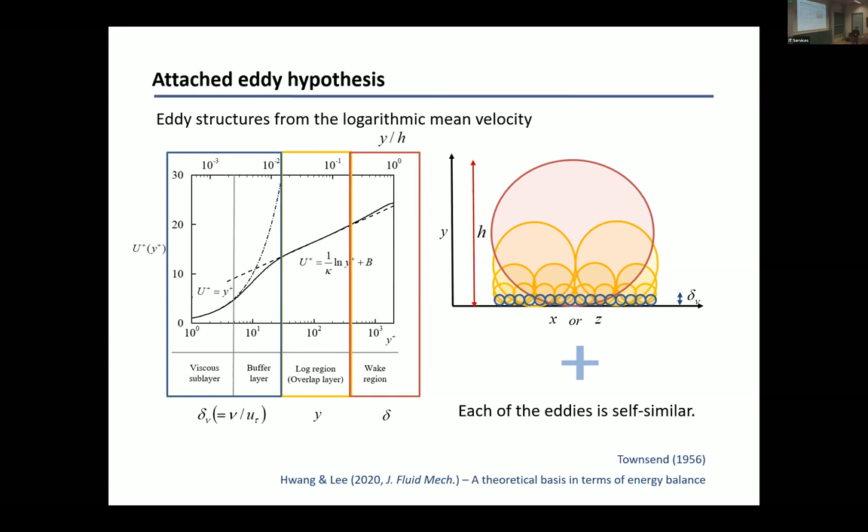So basically, if you have self-similar production, dissipation, transport and integral length scale, your mean velocity profile must be logarithmic. What we have also found is that we managed to find invariant solutions which are self-similar, okay? But these structures do not all exist in the same domain; they are just self-similar. These possibly represent individual ones.

And we are not the only ones who computed this type of solution. Initially, Bruno Eckhardt, before he passed away, computed this sort of thing for Couette flow by continuing EQ7 and EQ8 of John Gibson's solutions. And then Tobias Schneider's PhD student also computed this for the asymptotic suction boundary layer.

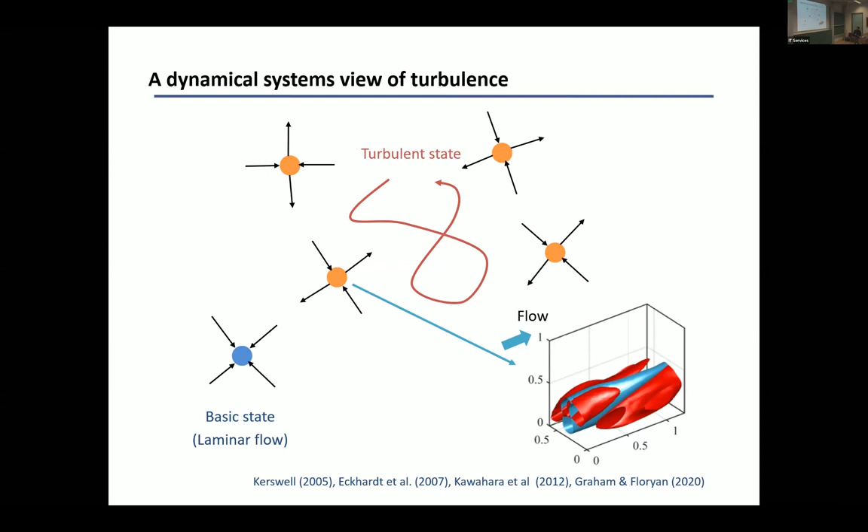So when we found this, in a superficial sense, we can use this picture, okay? Each dot here represents, say, an individual attached eddy, and you assume that turbulence is just bouncing around, like the pinball picture we saw on the first day, and laminar flow here is the stable solution. That's the picture we often use to justify the relevance of this type of solution.

So what we wanted to do is test this step by step. First, we've seen quite a few minimal flow unit talks this morning by Daniel and Sherbin. We consider the same minimal flow unit, but we take a bit more aggressive approach. We wanted to cut out the entire outer part of the wall region and only isolate this guy. We don't want to solve somewhere out there.

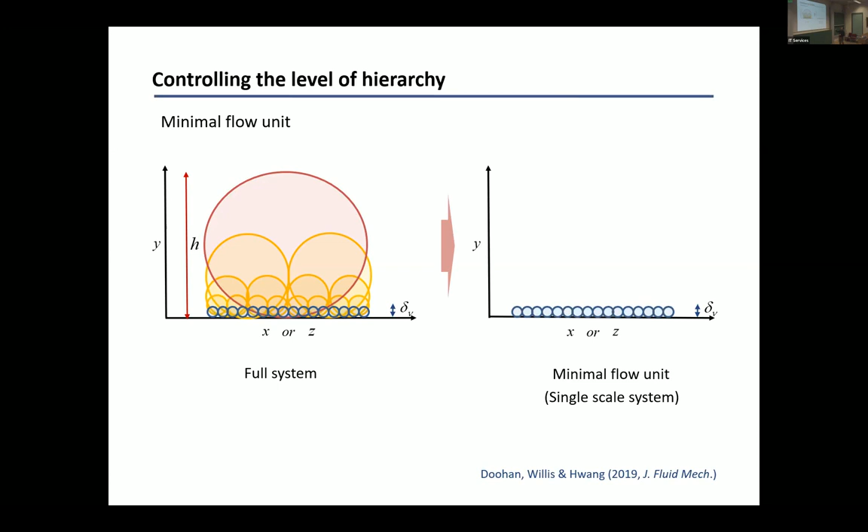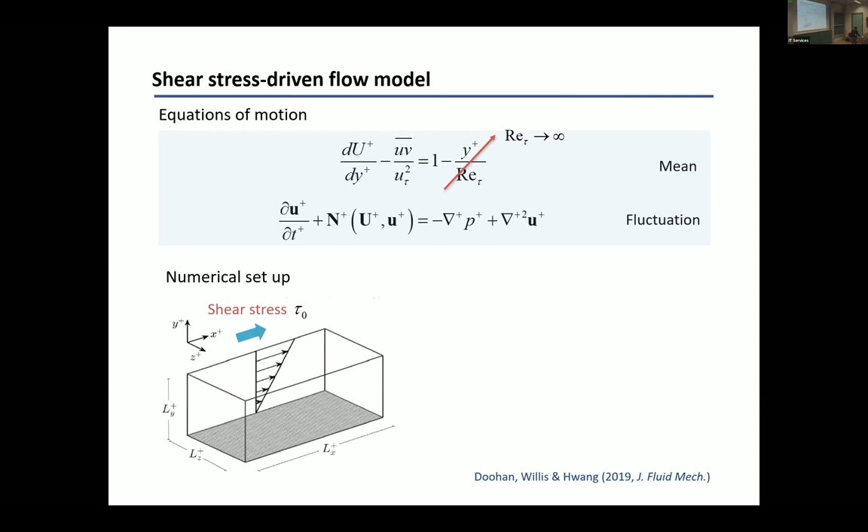So by doing so, we removed this term, and then at the top of the simulation domain, we apply basically a uniform shear stress, and then we removed all the top domain to control the hierarchy in the turbulent flow. So we then consider a typical minimal flow unit box size. So here we have 90. Okay, so we are now really restricting the domain even more in this direction, and we take this minimal flow unit pioneered by Javier.

So we computed quite a lot of solutions, actually 13 solutions here. And then we just visualize the usual observables that we know from the self-sustaining process. So here, these are the streaks. This is basically the box-averaged streamwise velocity. These are the rolls, the energy of the uniform rolls in the streamwise direction, and the rest is the waves capturing the meandering motion of the streaks.

So what you see here is that, consistent with the picture I have shown previously, we have a bunch of upper branch solutions here. One of them is a periodic orbit, the short periodic orbit, and turbulence really seems to be bumping around, but this turbulence is actually a chaotic saddle. So the edge is leaky, as we discussed, and sometimes it dies out. And when it dies out, it's actually bumping around the lower branch solution. Okay, that's what we saw from this simulation. So we are happy so far.

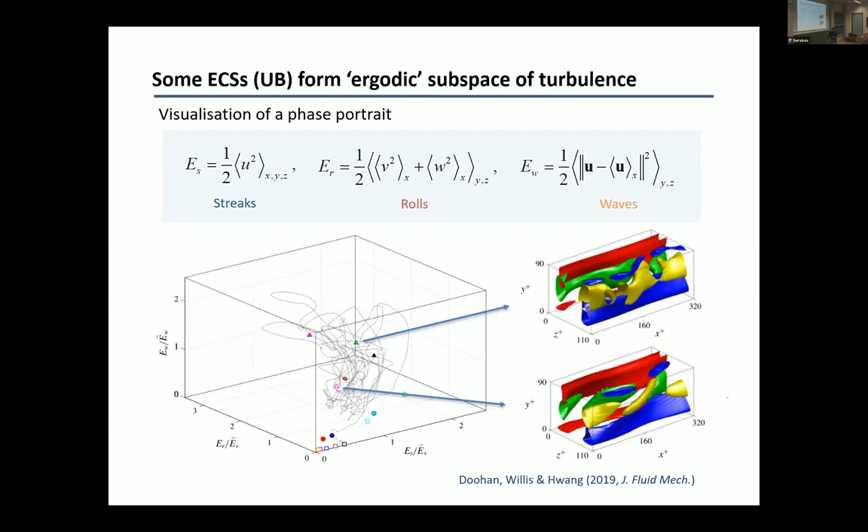And what we know is that those upper branch solutions do actually form a kind of ergodic subspace of the turbulence, which means turbulence really visits these guys to some extent. So these guys may really be used to approximate the turbulence statistics or whatsoever.

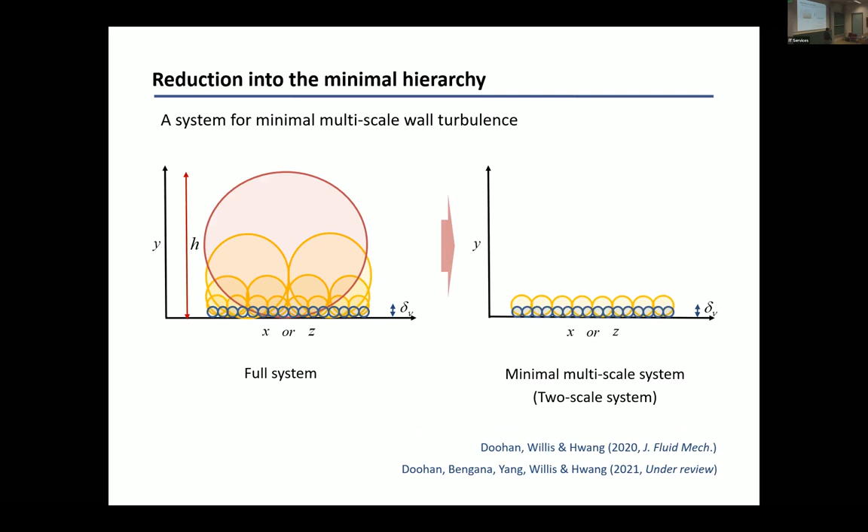So now we consider a slightly more aggressive case. We consider two-scale minimal flow units. So we have one big structure, and then a smaller structure which can live in the near-wall region. Exactly the way we have done it is that we took exactly the same model, but roughly doubled the box size in all directions. So then we have one big structure here, and a typical near-wall structure as the smallest possible structure here.

So here the situation is a bit more complicated because we have multi-scale behavior in the system, so we had to come up with different types of observables. What we do is consider turbulent velocity fluctuations and decompose them into large scale and small scale. The large scale just contains the structures whose spanwise size is the box size in the spanwise direction. Because structures in turbulent flow are typically elongated, this contains all the large-scale streaky structures, etc. So this is a reasonable way to capture the largest scale. And for the small scale, we just use the rest.

Then we wrote down the equation for each scale. Here P is a projection operator to the particular scale. PS is the projection to the small scale, PL is the projection to the large scale. So this is without decomposing the linear term in that way. What we have done is multiply UL here and US here, and then integrate over the computational box. So this equation is a bit complicated. I think it's important for me to go through.

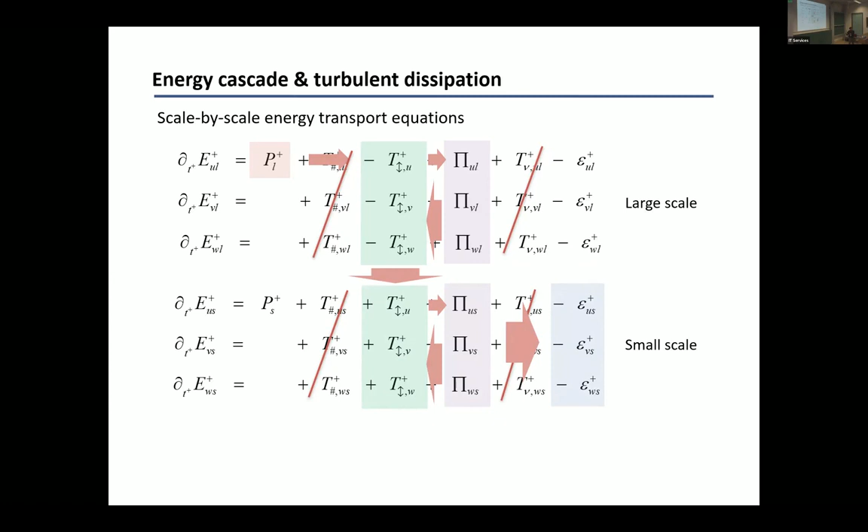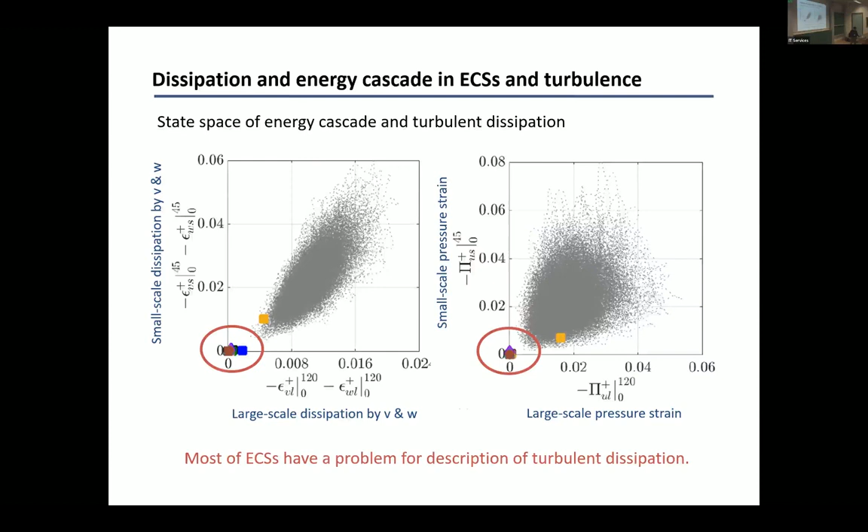If you really plot the dissipation, this is one of the upper branch states that we have, the larger-scale upper branch state, and this is the dissipation contour. This is the larger-scale coherent state. You see that the dissipation is actually quasi-2D, in the sense that these are just elongated, fairly flat, like this. On the other hand, if you look at the dissipation of the turbulence, it's fairly isotropic.

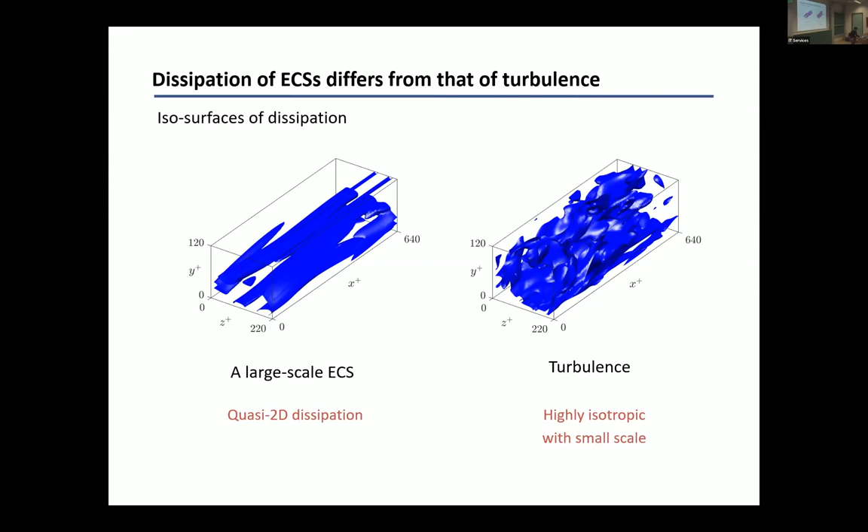So then where does this come from? Let me write down the equation for U. Okay, this is a full velocity fluctuation. So full velocity, and capital U is the mean, and I'm going to decompose the fluctuation into the x-average, streamwise average fluctuation, and the rest. Then I will have this equation for the streamwise-averaged velocity fluctuation here, and this is basically 2D Navier-Stokes.

But this equation is known to be globally stable at all Reynolds numbers. It will never generate a non-trivial solution if you go to high Reynolds number. Therefore, the only possible way to derive some non-trivial solution is through this term. Okay, and also this term contains the production term, but this is the equation for the streamwise average velocity fluctuation. This describes basically the lift-up effect that generates the streaks.

And the rest of the equation is this, okay? And here we have another production term. This is typically known to generate the streak instability, meandering motion of the streaks. Okay, so this is the term that you have. And the exact coherent state means these processes exactly balance each other. So this equation leads to the non-trivial velocity fluctuation here, but once U zero is large, this can create the instability. So therefore, this is a two-way interaction. You can find some steady solution which exactly satisfies this balance.

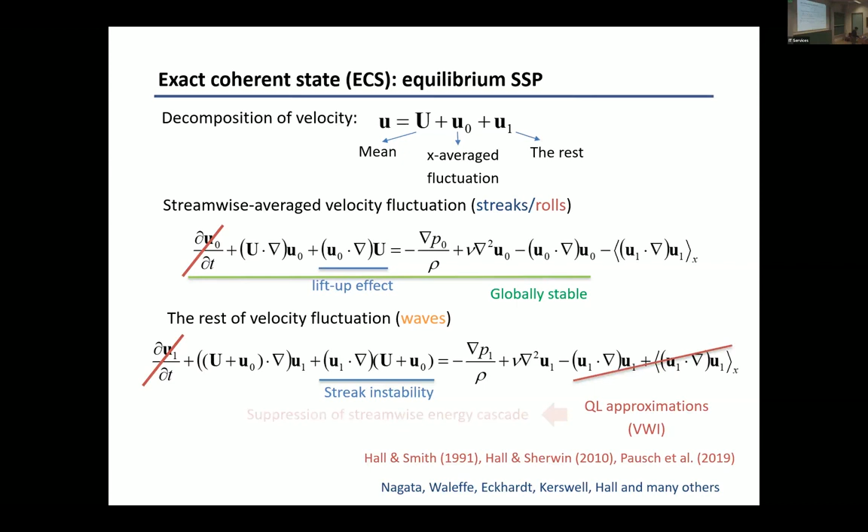And the other thing I'd like to say is that this one is also kind of triggering the energy cascade in the streamwise direction. Therefore, it's acting as a precursor of turbulent dissipation. If the Reynolds number is large enough, this linear part of the equation typically gives you large values around the critical layer of the streaky flow. In the exact states you see here, the blues are dissipation, and they are all around the critical layer. And what is interesting is that you see exactly the same in turbulent flow. Basically, this streak instability process is kicking off turbulent dissipation.

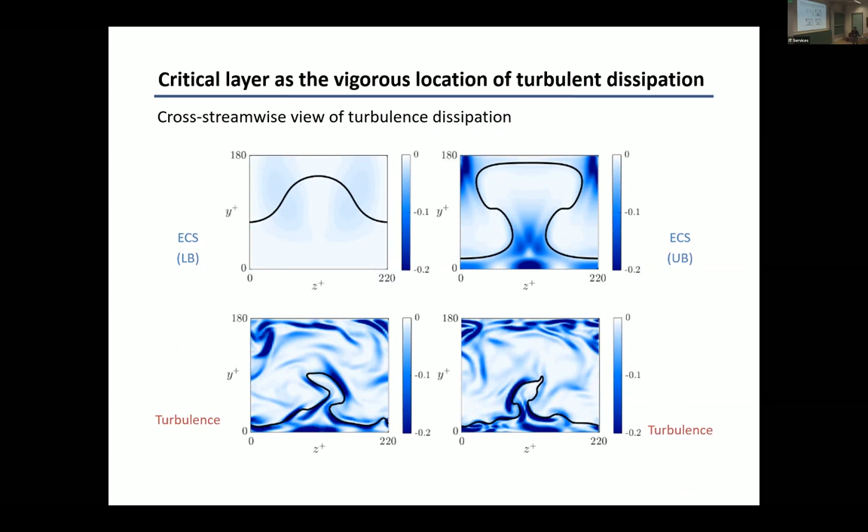Okay, that was the one thing. The second thing is, let me come back to this picture. So we had the energy cascade here. We transport energy from large to small scale, but sometimes the transported fluctuation at small scale excites the production at small scale. But production typically requires the V fluctuation to have a non-zero value. So let me track what is happening here.

What I'm going to do here is compute the correlation between this pressure transport, the nonlinear transport in the Y direction, and the small scale production. If you look at these three time traces of three observables, especially the black one and the production at small scale, you see that they are fairly well correlated. And if you really calculate it, the correlation coefficient is not really small. It's 0.5.

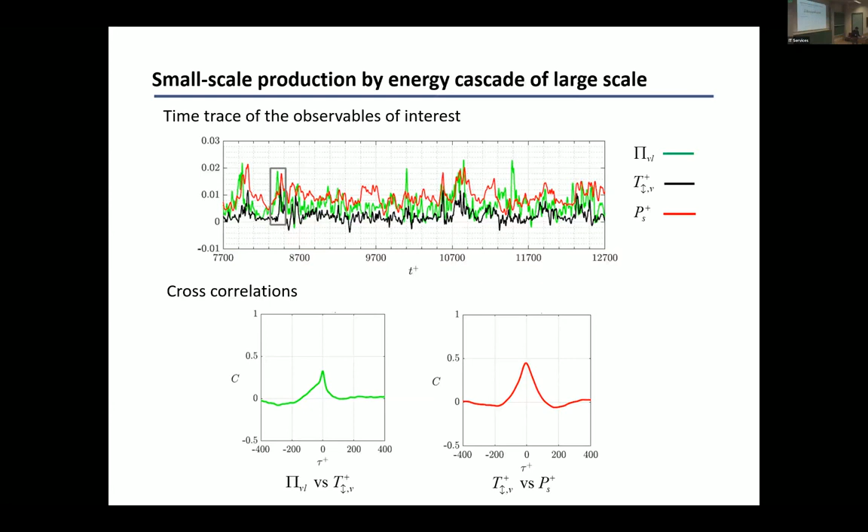So let me see what is happening here. Let me just take one instance here. This is again the time trace. The green one is the pressure strain transport at large scale. The black one is the nonlinear interscale transport. And the red one is production. And this yellow one represents the small scale streaky motion. So let me run a movie.

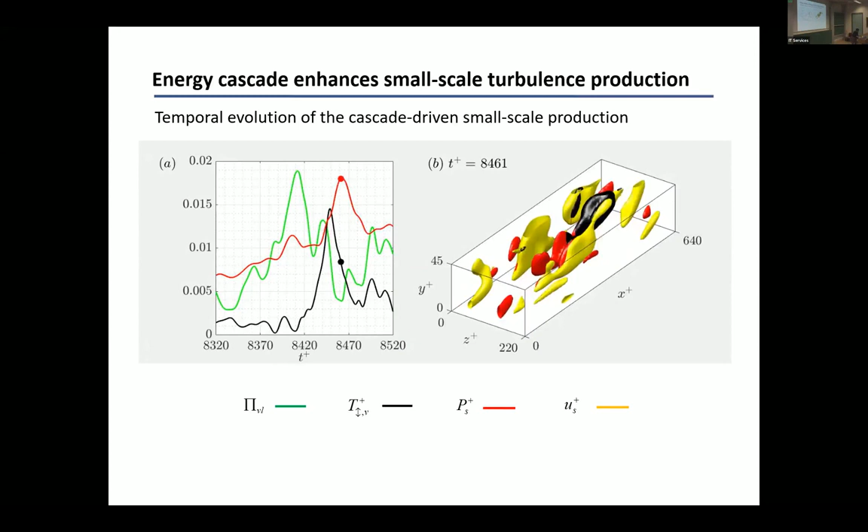You see that when the nonlinear transport becomes large here, production and this nonlinear transport are actually all collocated. So basically this triggered the production like this. If you look at this picture from the side, that's what we see here. I think quite many of you are familiar with this. This is the Orr mechanism. This is not the intrascale process. This is the interscale process, essentially.

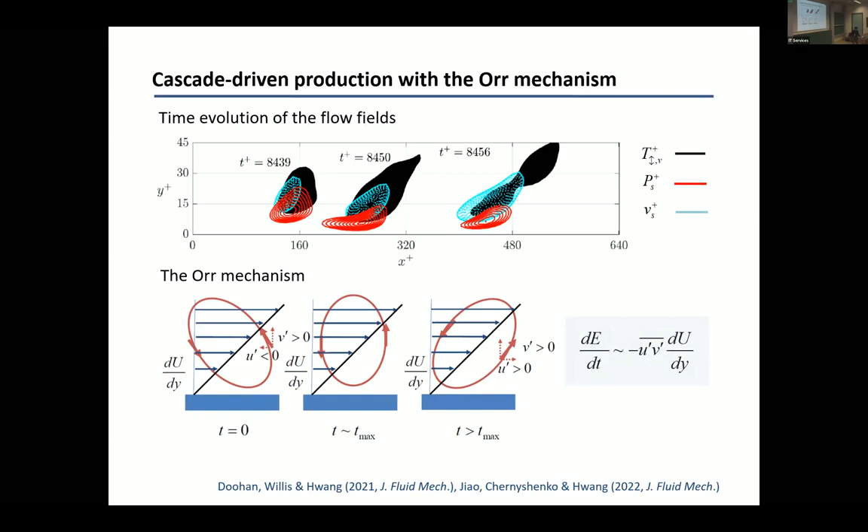So let me conclude. The answer to the original question is probably not. And what exact coherent states really do is depict the partial physical process of multiscale turbulence. So we also learned quite a lot by doing this. We have two: a large-scale self-sustaining process and a small-scale self-sustaining process.

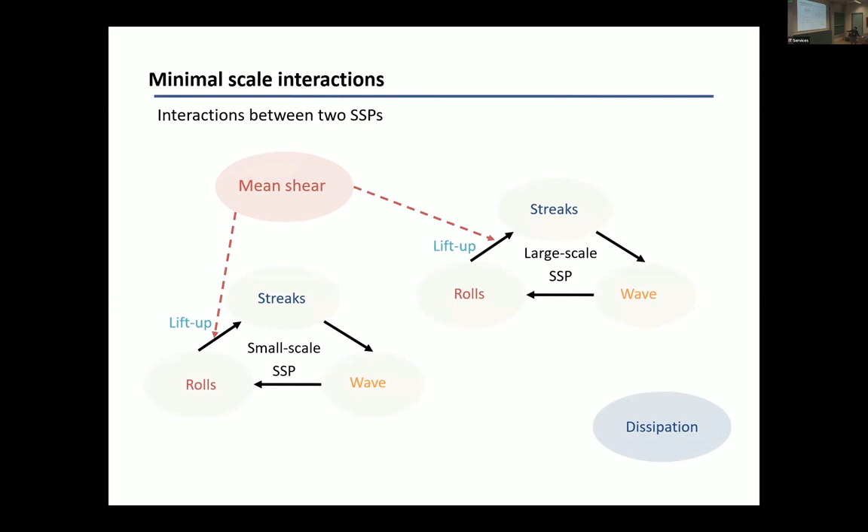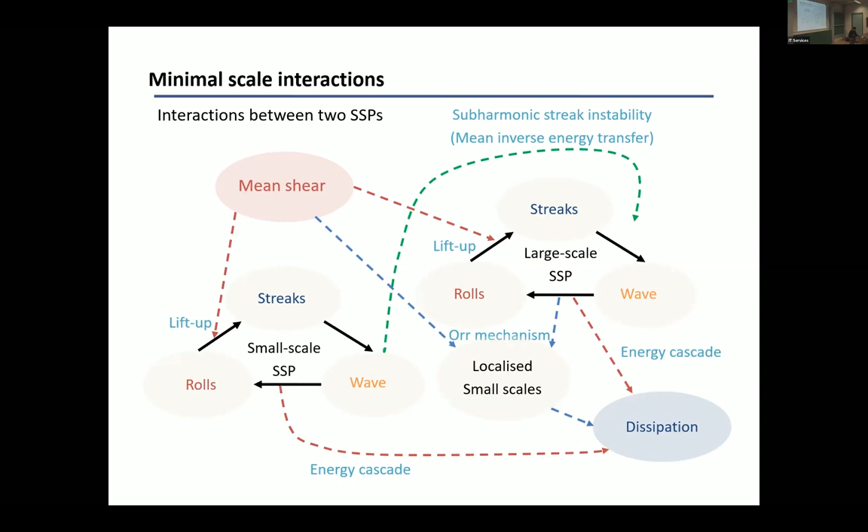And the most fundamental thing in shear turbulence is production and dissipation, with the mean shear pumping the energy for the lift-up effect. And dissipation takes place when the streaks break down. In between, when this breaks down, it can trigger the Orr mechanism, causing another dissipation. The other thing we discovered is that sometimes when waves break down, they can feed energy to the larger scale. And this is related to that particular type of coherent state.

And the last thing I'd like to say is that we may get the criticism that we really didn't compute the right solutions. That's a true criticism we have to take. But let me explain how difficult computing such a solution is. I'm going to consider a two-scale system. In shear flow, they have to have different speeds. Therefore, if you consider two traveling waves propagating with different speeds, then in the moving frame, this solution must be a periodic orbit.

So we tried to find this multiscale periodic orbit by superposing many solutions, but we've never been able to find it. What this picture also says is that if you consider the dynamics of these two structures, it will be a very exotic solution, like quasi-periodic solutions such as tori, etc. So in general, if you consider many scales, they should be quasi-periodic, very chaotic solutions. So that's the general difficulty. And we know that as we increase the Reynolds number, it gets incredibly difficult to calculate this kind of orbit. So let me finish here.

Okay, so. Here we go. Yeah. So thanks a lot.

I just wanted to add to your last point, which is exactly what I wanted to say before. What if we have to look for tori, and then we are lost? So I wouldn't say the dynamical systems picture is wrong in any way, but we don't have the means to find the structures that are relevant.

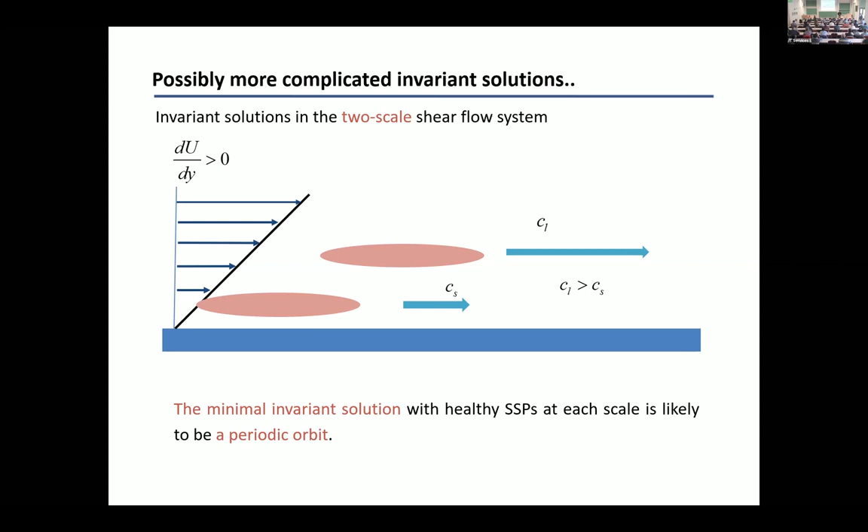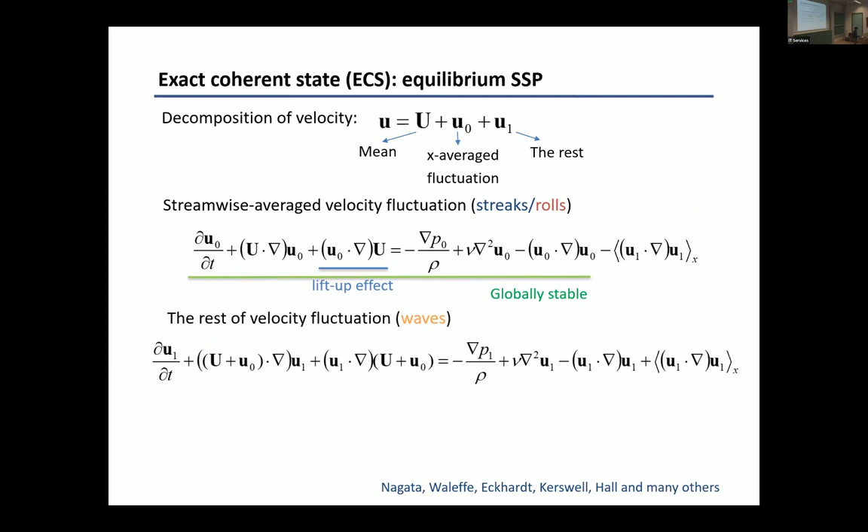Yeah. Just a small comment. I've made this comment before when you gave this talk. I don't see why you have the confidence to call this a multi-scale system. Your large scale is one wave number in the spanwise, the outer scale, and then you're drawing all these conclusions from just that. What's to say you couldn't cut your domain in half in terms of the spanwise wave numbers? And that's what I did. No, but in terms of the wave numbers, not the actual spatial scale. You just have KZ as your outer scale. I'm saying, split the wave numbers in KZ. I don't know how many you've got in your simulation, 30, 60, and the first 15 are your scale, but it's all quite artificial in some sense, right?

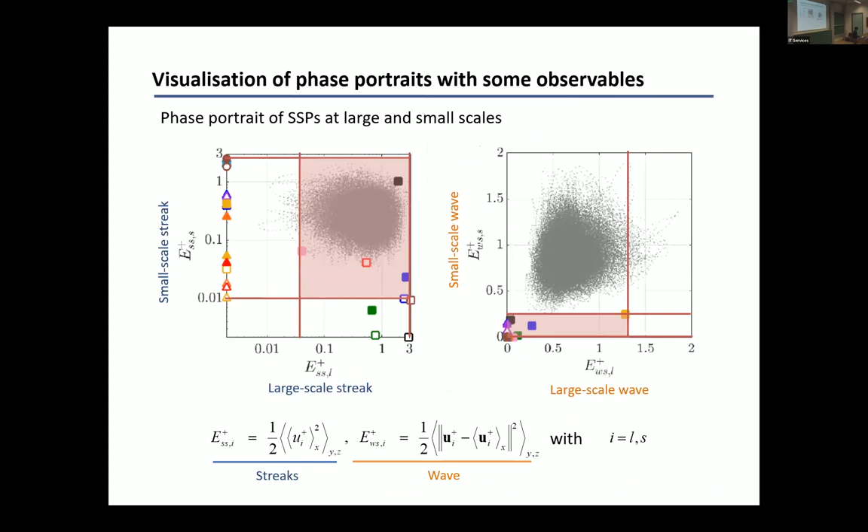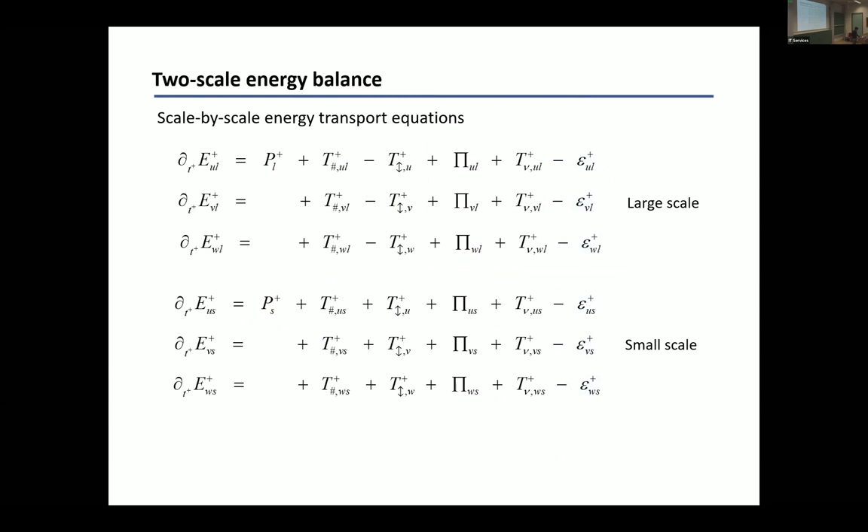Okay, so let me explain that to you. Let's try again. So you see this here. You see that this streak structure is elongated all the way down the domain. So basically, at this scale, the largest energy containing wave number is kz equal plus minus 1, the fundamental harmonic, and kx equal, say, 0, right? In this one, you see the same, kz equal plus minus 2, but it has to contain everything in the x direction because the smallest length scale still extends all the way to the box size. Okay, I'm not claiming that I did a very clean decomposition. Isn't it just arbitrary? Yeah, but my point is that if you do so, then this one captures mostly large scale, that one captures mostly small scale. That's what I'm saying, nothing more than that.

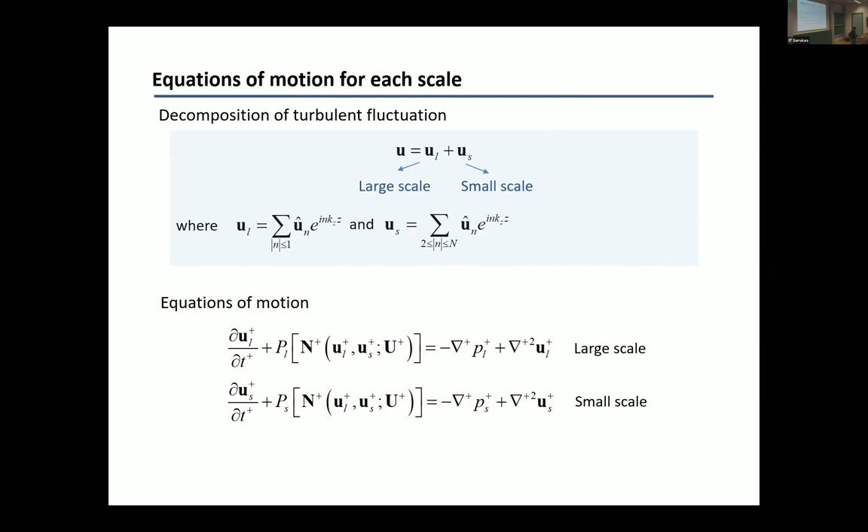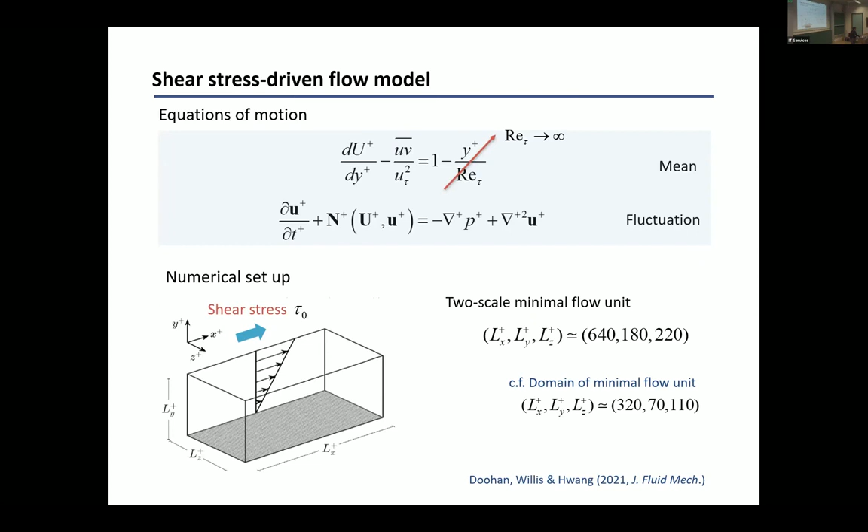Yeah, but your projection operator forces that. Projection operator is what? P, yeah. P just takes the largest spanwise wave number. Yeah, so there is a problem in that way of describing it. You could do this with any traveling wave. You could just say it has scales. But you could have two projection operators. For example, our small scale solution has zero value in the UL. What's UL? It's the large scale velocity field. We don't have a large scale velocity field for small scale solutions. And your small scale solutions are based on the fact that KZ is... Yeah, we don't have any energy in that KZ. All right, so this is a traveling wave in half the box. Yeah. And then what's the structure in the large box?

Is that another traveling wave? This is not half box. This is just in the large box. Okay, right. We basically set the exact copy, 4 copies, and then we continued in the y direction. So these two are there at the same box. So they're two... one does not have a UL. So they're two different ECSs. Two different ECS. Right, I see.

And then the other one only has KZ in the highest. Yeah, so in this one, there's no energy in the UL component. I understand that. That one, the energy in the UL component is much larger than the US component. Yeah, but it's still got structure in the lower. Yes, this is the point that I'm saying. I agree with you, but we have to have some decomposition to define the observable. So that's not clean cut, as you said, but it does the job reasonably well.

Okay, so the other comment I would have, if I'm allowed, Mr. Chairman, is that you're making the point based on the fact that these ECSs are fairly quasi-linear, and nobody expects quasi-linear waves to explain turbulence. You've got to move away from that, and you've got to track some instabilities away. So I know the VWI basically gives you quasi-linear approximation. But for the reason that you just illustrated, you're not going to get that fluctuation interaction. So that's what you've highlighted today, but nobody expects these quasi-linear waves to do the job.